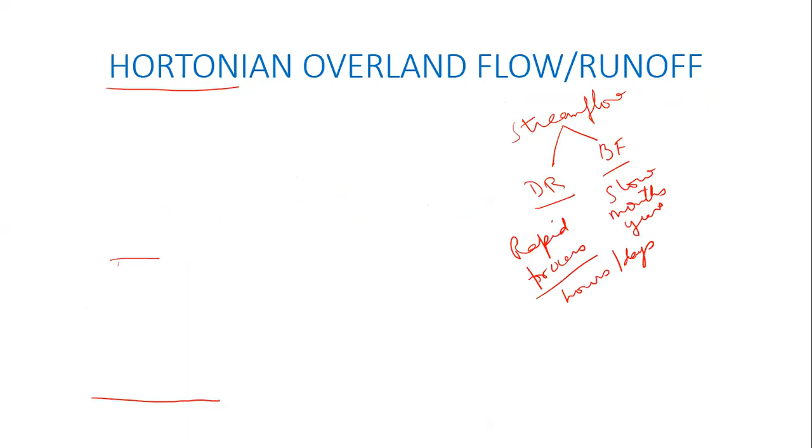Okay, so let me just quickly go back to, okay, maybe even one more slide back. Anyway, so the point is, I have these two different components. The component which is above the base flow, you can call it direct runoff, DR. You can call it excess rainfall. You can call it overland flow. The most popular term used is direct runoff. Direct runoff and excess rainfall, or rainfall excess, or effective rainfall, all of these different terminologies are used. Direct runoff is probably the most popular terminology used.

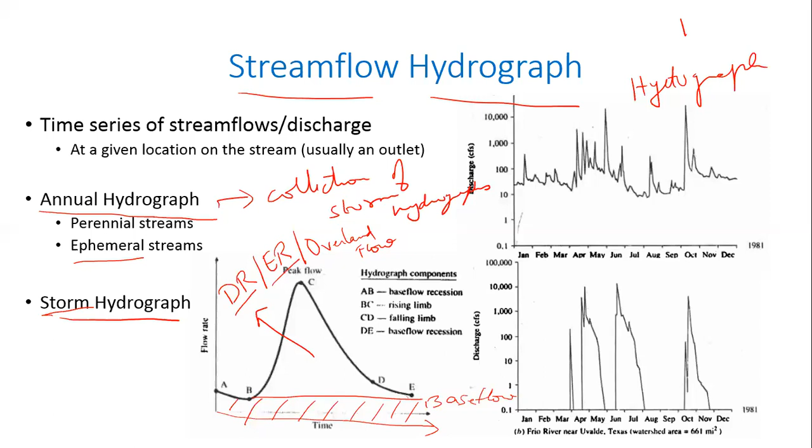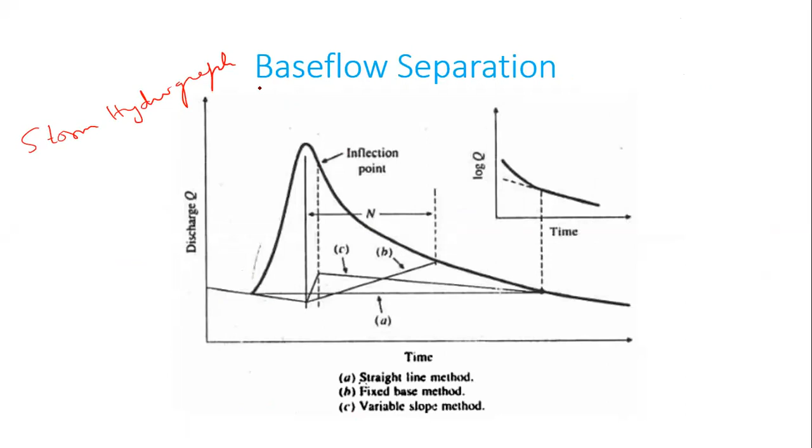Now, okay, so let us get into the next aspect. So I've already spoken about this. The next idea that I want to talk about is separating out base flow. So you see, in the previous slide, we saw a storm hydrograph. Now, when I am given a storm hydrograph, one of the first things that I do is to separate out the base flow from it, to separate out from the storm hydrograph which component of it is base flow. If I separate that out, then I know how much is the direct runoff. So there are many different ways of separating the base flow from a given storm hydrograph.

Okay, so you see over here, let's see this black line over here. This is my storm hydrograph. Oops, sorry, it's just badly drawn, but let me not even try to draw it. Unnecessarily creates confusion. Okay, maybe I'll just denote the initial portion. This is where the base flow starts, and then it goes up. This is the rising limb, and then I have the falling limb. Okay, and then I have base flow recession again.

Okay, so now if my objective is to separate out the base flow from the storm hydrograph, you understand what I'm trying to do? At the outlet of the watershed, I am measuring the total stream flow in the stream. When I just see water flowing down the stream, just by looking at it, I can't say that this much is base flow and the rest of it is direct runoff and so on. So it's impossible to estimate which component of it is base flow and which of it is direct runoff. Therefore, there are many different ways of trying to separate out the base flow from the storm hydrograph.

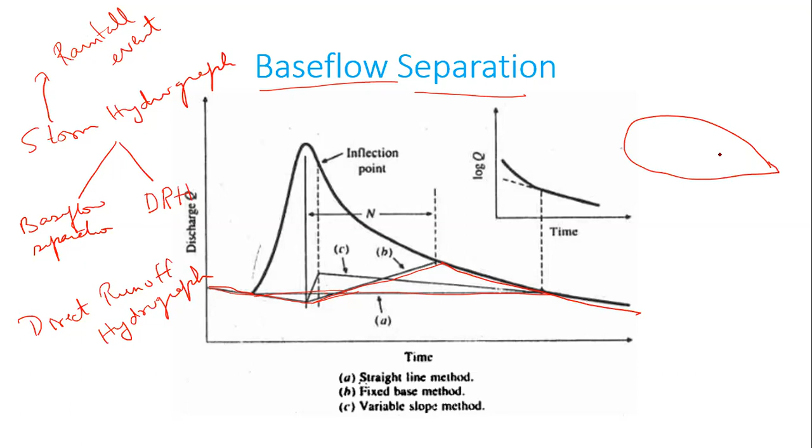So we've already discussed this before. You have a watershed. You know what a watershed is, right? Okay, so in the watershed, typically there will be one major stream and multiple other streams which may come and join into it. If at this outlet of the watershed, I measure Q in the river that is draining that watershed, and suppose I receive some rainfall over some number of hours, I sit at this outlet and continuously measure the flow rate in the stream. That gives me this curve which goes up like this and then comes down like that. That is what I'm calling the storm hydrograph, or the stream flow hydrograph, whatever you want to call it.

This stream flow hydrograph is telling you the response of the watershed as a function of time to that rainfall event. Once I get that stream flow hydrograph or storm hydrograph, I separate out the base flow component of it. Whatever I'm left with, if I subtract out the base flow from this storm hydrograph, is the direct runoff hydrograph of this watershed for that given rainfall event.

Okay, so any other questions? So this base flow, sometimes it is possible that water may get into the aquifer in this region. If that happens, we are not discussing the fact that some water may get into the aquifer. Yes, it may, and it may be sucked back into the catchment area by the aquifer, because the slope inside the aquifer might be different from the ground level slope. This possibility is there, but

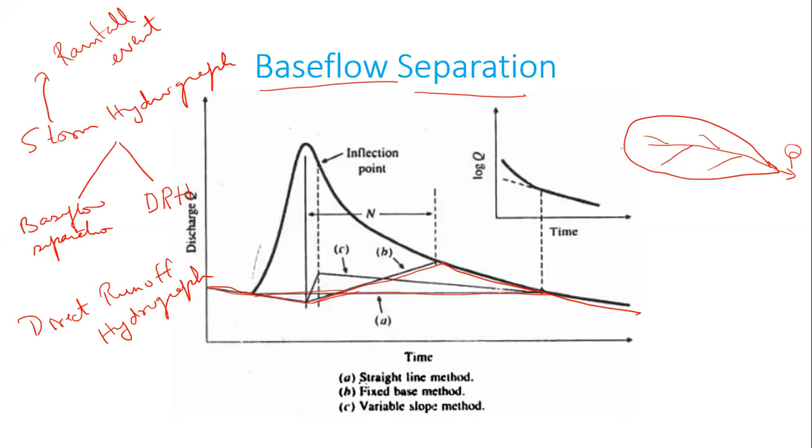Okay, let's just try to solve this problem. It's a fairly straightforward, very typical kind of problem. Let's read through it. Rainfall of magnitude 3.8 centimeters and 2.8 centimeters occurring on 2 consecutive 4-hour durations on a catchment of area so and so produce the following hydrograph of flow at the outlet of the catchment.

So you see, when you read the statement, it has got so much information. It is telling you the magnitude of rainfall during 2 consecutive 4-hour durations. Over 8 hours, 3.8 plus 2.8, how much is that? 6.6. So 6.6 centimeters of rainfall has been received over 8 hours in these 2 4-hour durations, and the area of the catchment is given to you, and this produces a hydrograph at the outlet. This is the hydrograph. The question is: estimate the rainfall excess and the phi index.

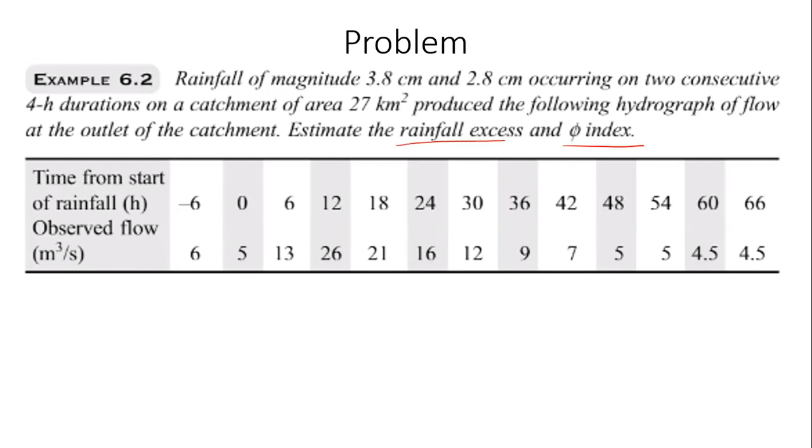Now the word that is used here is rainfall excess. What does this mean? Rainfall excess is the same as direct runoff. So please note that this terminology, rainfall excess, means the same as excess rainfall, which is the same as effective rainfall. All of these things mean the same thing, which is the same as direct runoff.

Okay, do not get confused by all of these terminologies. And then of course, phi index, we've already encountered it. So then when you look at the rainfall, the observed flow at the outlet, you have flow as a function of time, and time starts before rainfall, -6, time from start of rainfall. So 6 hours before rainfall started, the observed flow was 6 cubic meters per second. When rainfall started, 0, the observed flow was so and so. And then it gives you the flow as a function of time, 6 hours later, 12 hours later, 18 hours later, and so on, all the way to 66 hours.

So what would you say? So now if I were to plot this as a function of time, I have time, hours, cubic meters per second. It starts with 6, 5, and then 13, 26, 21, whatever it is, 16, 12, 9, 7, right? So it looks something like this. If you draw it on a graph, it may look something like this. Now, given this information, can anybody tell me what value of base flow we can assign to this?

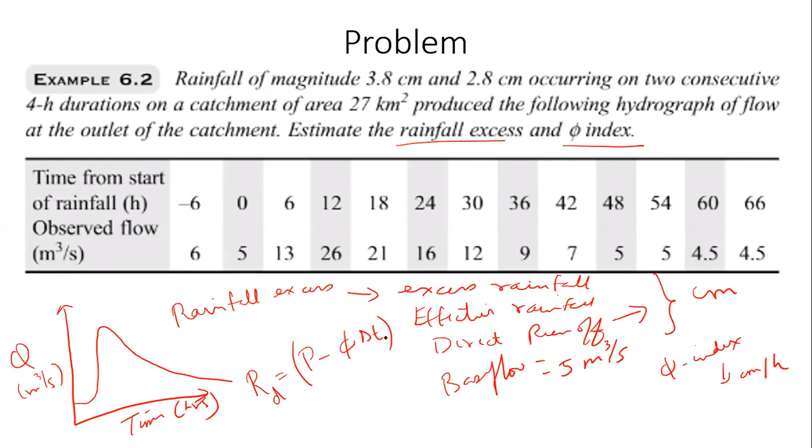So if you remember the phi index equation, it looks something like this. RD equal to P minus phi times delta T, something like that. Where P is the total rainfall or the total precipitation, and phi times, actually not even delta T, it should be phi times T suffix E, which is the time of effective rainfall, but that's okay. We'll just leave it at phi times delta T.

So in this equation, RD, which is the excess rainfall, will have units of centimeters. Your total precipitation will have units of centimeters. Phi times delta T should also have units of centimeters. Only then your equation will be homogeneous. So the phi index will naturally have units of centimeters per hour multiplied by hour, so that will give you centimeters. So you're expecting an answer in centimeters.

But we have direct runoff in cubic meters per second. Now, how do I convert this cubic meters per second to an answer in centimeters? Anybody has an idea? Divide by area. Okay, if I divide cubic meters per second by area, assuming the area is in square meters, I'll get meters per second. I'll not get meters.

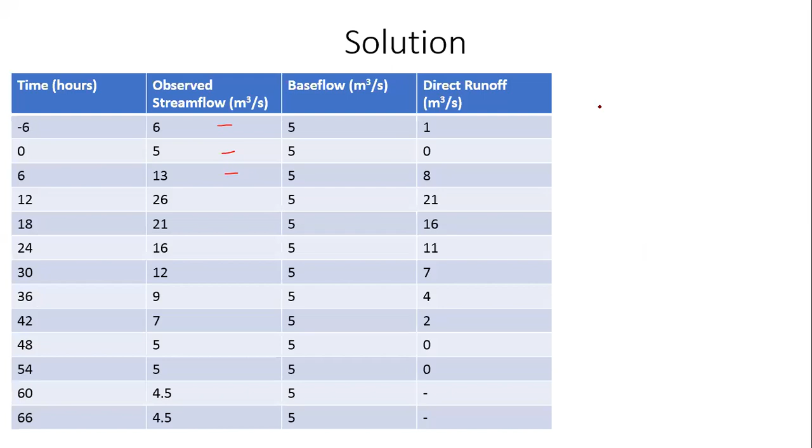So this direct runoff, can I draw a direct runoff hydrograph for this? I'll have time in hours on the x-axis, and direct runoff in cubic meters per second on the y-axis. At time t equal to 0, what was the direct runoff? 0. At time t equal to 6 hours, direct runoff was 8. At time t equal to 12, it was 21. It may not be to scale, forgive me for that. And then at time t equal to 18, it became 16. Then it became 11. Then 4. Then 2. And then 0. Something like that. So that is the direct runoff hydrograph.

So at every 6-hour interval, I have the ordinate. I might have drawn it incorrectly, don't worry about that, but now focus on the message. So now this direct runoff hydrograph, on the x-axis I have hours, and on the y-axis I have cubic meters per second.

So I want an answer in units of length, centimeter, meter, millimeter, whatever it is. What do I do? Find the area under this graph. Assuming I convert hours to seconds, the area under this graph will give me cubic meters. It will give me a volume, right? So you simply compute the area under this graph.

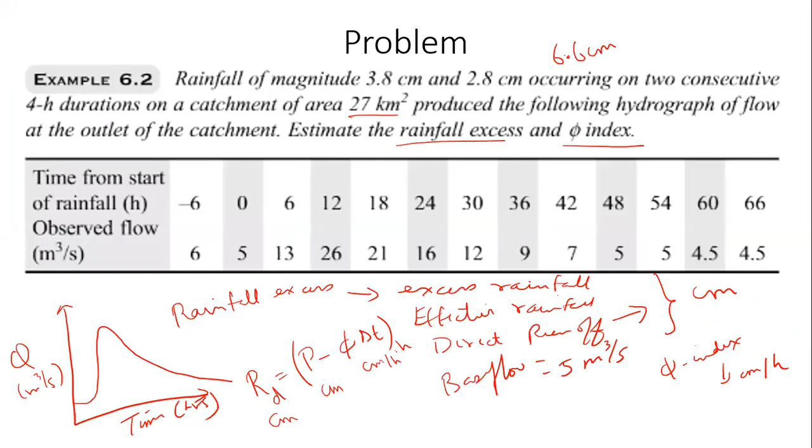Now, if you remember, a couple of classes back we solved a problem where we used a trial and error method to estimate the phi index. In this particular problem, I have two rainfall events over two consecutive 4-hour durations: 3.8 centimeters in the first 4 hours and 2.8 centimeters in the next 4 hours. My analysis so far tells me that my excess rainfall, 5.52 centimeters, is greater than the rainfall received in either of the 4-hour durations.

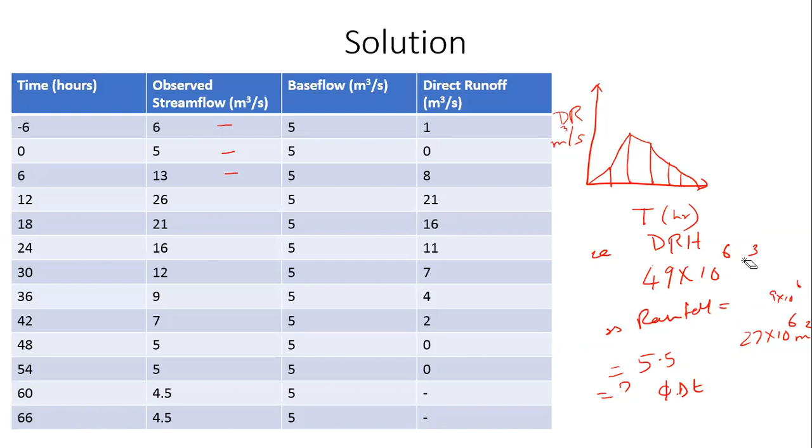So therefore, my phi index should be less than... I want somebody to answer this. Phi index must be less than 0.7. Why is that? Let me erase all of this stuff. This is a critical aspect that I want you all to understand. Just by looking at the magnitude of my excess rainfall, I'm able to tell you.

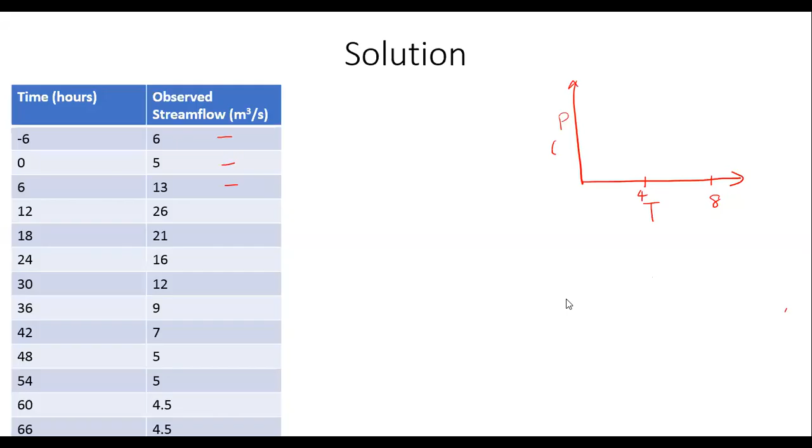Okay, so let us draw the rainfall hyetograph, T, 0 to 4 hours and 4 to 8 hours. Right, this is the rainfall received. Oops, I'm sorry. Are you able to see my screen now? Hello, you're able to see my screen, right?

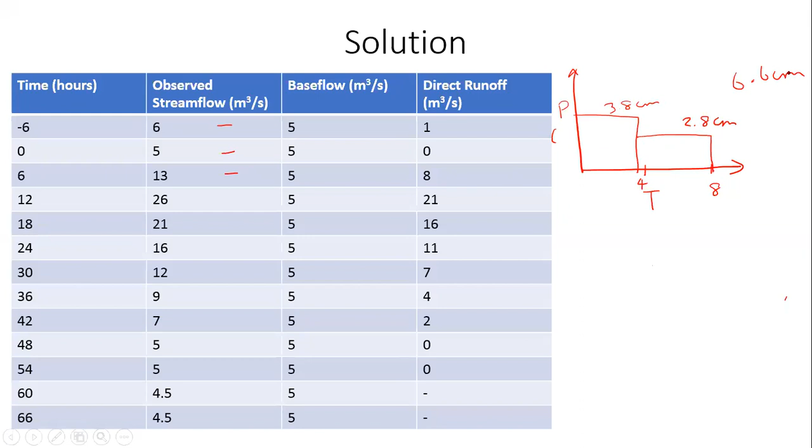Yes, sir. Okay. So in the first 4 hours, we received 3.8 centimeters of rainfall. Just assume that it's intersecting at the right point. In the next 4 hours, I received 2.8 centimeters of rainfall. So this is 3.8, this is 2.8. This is the total rainfall, so 3.8 plus 2.8, 6.6 centimeters of rainfall has been received. Out of this, we just now solved, 5.52 centimeters of runoff depth.

So in the second 4 hours, 2.8 centimeters in 4 hours means the rainfall intensity must have been 0.7 centimeters per hour. Correct? In the first 4 hours, if I receive 3.8 centimeters of rainfall, the rainfall intensity must have been 0.95 centimeters per hour. In the second 4 hours, if I receive 2.8 centimeters, I must have received a rainfall intensity of 0.7 centimeters per hour.

Now, if my phi index... So I have rainfall intensities I of 0.95 centimeters per hour and 0.7 centimeters per hour. If my phi index is greater than 0.7 centimeters per hour, for example, what would that mean? If my phi index is greater than 0.7 centimeters per hour, that would mean only the first 4 hours contributed to the direct runoff, correct?

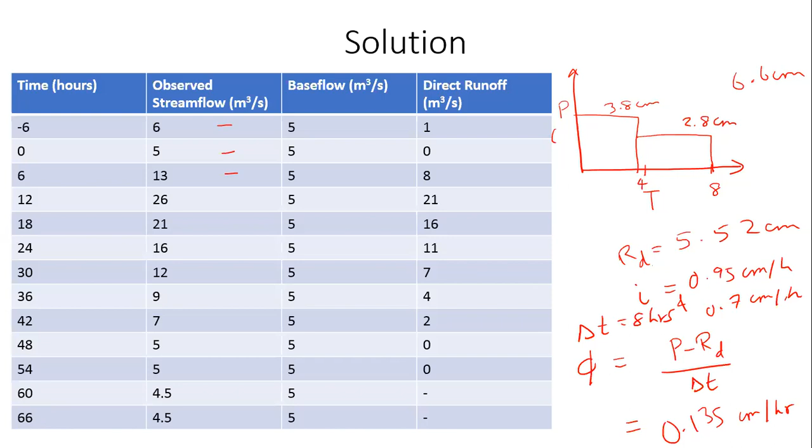All right. I've shared another 4 or 5 pages of reading material on how to estimate excess rainfall. This one was a relatively simple problem statement, where you knew the stream flow, you separated the base flow, found the direct runoff, and then estimated the phi index. Suppose I give you a relatively more complex scenario. If you go back and look at the notes, that will tell you how to solve this problem that I'm going to share now. I think we have the background required to go through this entire problem.

I'll go through this problem very, very quickly. I want you to understand the spirit of it, and then come back and look at the solution that is going to be there in the slide. Basically, I want you to understand the process. Don't worry about the numbers. The numbers are available in the textbook. I'll share the problem with you. You can walk through the problem statement and understand it, but understand the spirit of it.

So in the previous problem, the stream flow was known and the rainfall was known, and you tried to find out what the runoff or the excess rainfall was. Now here I'm going to have a different scenario. Here the rainfall is known and the kind of soil in the watershed is known. Then you're asked to find out what the excess rainfall would have been, given the rainfall and the kind of soil. So these are the different combinations of problems that you can come up with. One, I give you the stream flow and the rainfall and ask you to find the excess rainfall. Here, I give you the rainfall and the type of soil and ask you to find the excess rainfall.

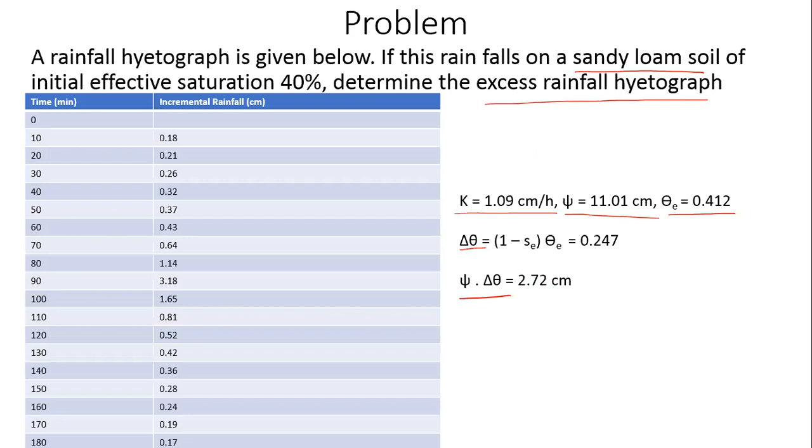So all of this information is known to you, and you are expected to find out the excess rainfall hyetograph. Rainfall hyetograph is the actual rainfall hyetograph. Excess rainfall hyetograph is the portion of the rainfall hyetograph which has been converted to runoff. Okay, so that's what the terminology means. So let's just quickly go through the solution. You will understand what I'm doing.

I've just taken that incremental rainfall information that was given in the previous slide and put it over here. I've converted it into cumulative rainfall in the third column and rainfall intensity in the fourth column. You understand what I've done here? 0.18 centimeters of rainfall in 10 minutes, right? So the cumulative rainfall is 0.18. The next 10 minutes, I receive a further 0.21 centimeters of rainfall. So the cumulative rainfall will be 0.18 plus 0.21, 0.39 centimeters, and so on, all the way down.

Then here I have the rainfall intensity. In the first 10 minutes, if I have received 0.18 centimeters of rainfall, then the rainfall intensity must have been 0.18 centimeters divided by 10 minutes. Converted to hours, you will get 1.08 centimeters per hour. The next 10 minutes, I have received 0.21 centimeters of rainfall. So the rainfall intensity starting at time t equal to 10 minutes, for the next 10 minutes, is 1.26 centimeters per hour. And so on. What's presented here is the rainfall intensity for every successive 10-minute interval. From time t equal to 170 minutes to t equal to 180 minutes, the rainfall intensity is 1.02 centimeters per hour.

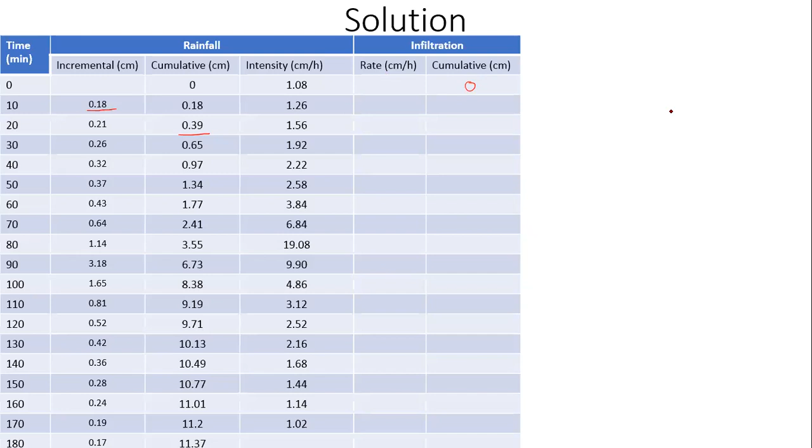Okay, what will be the infiltration rate at time t equal to 0? If you remember the equation, it looks like this: f equal to K, and so on. This equation is for some time t after the infiltration has started. At time t equal to 0, there's no way of estimating what the infiltration rate is. Theoretically, it's infinity, or a very large number. So we'll leave this blank, but remember, it's a very, very large number.

So if it's a very large number at time t equal to 0, and my rainfall intensity is 1.08 centimeters per hour, what can you say about time of ponding? Has it happened or not yet happened?

Time of ponding has not yet happened, which means for the first 10 minutes, whatever rainfall is happening is going to be converted into infiltration. Ponding will not happen, right? So I can estimate how much is the cumulative infiltration at the end of 10 minutes. How much will it be?

At the end of 10 minutes, F at t plus delta t equals F of t plus I into delta t, right? Since ponding has not happened, all the rainfall, this rainfall intensity I multiplied by the duration, has become cumulative infiltration. So cumulative infiltration at time t equal to 0 is known, it's 0. So F of t plus delta t, where delta t is 10 minutes, will be 0 plus I into delta t. What is I? 1.08 centimeters per hour, multiplied by 10 minutes. You convert that to appropriate units.

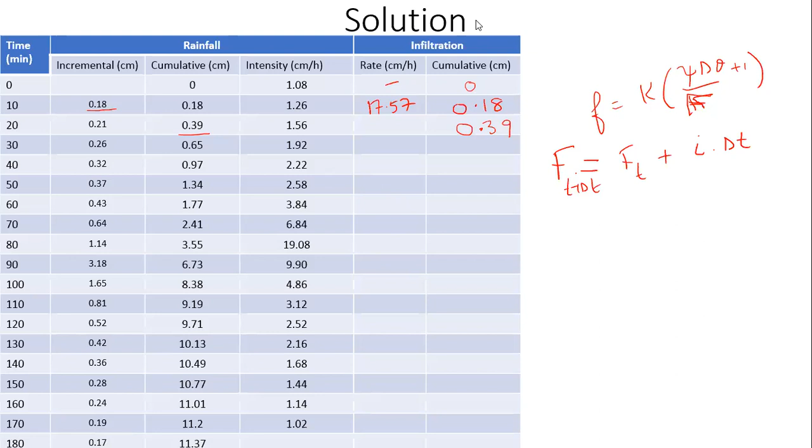Okay, there's a question in the chat window. One second. Afternoon class, Deepak, we've never had the afternoon class. Afternoon, you may have a surprise quiz. I don't know about that, but afternoon, usually we don't have the class. We only have the surprise quiz. All right. Okay. Thank you. I mean, usually we have a surprise quiz, or sometimes we have a surprise quiz. All right. Thank you.